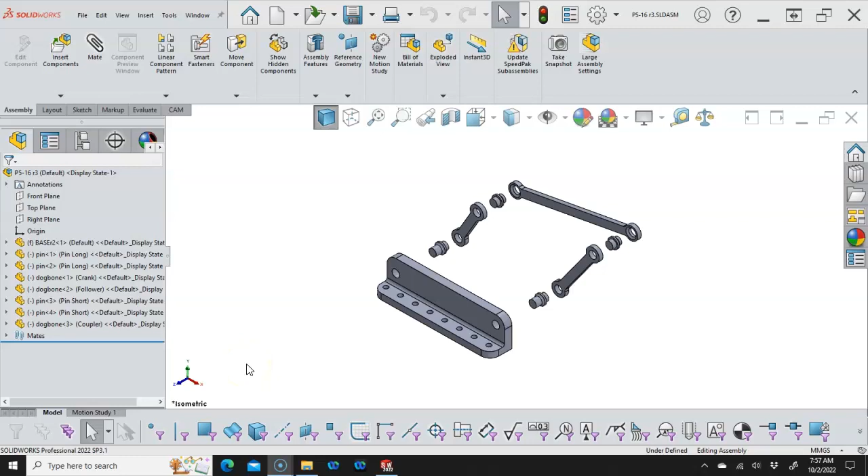I'm going to prepare this model for 3D print, and the process is pretty much the same regardless of the manufacturer. For 3D print, the plastic moves and the accuracy is pretty good, depending on the printer, filament, heat, and all the settings. But we're going to look at this the same way, same process. Even if I was making this out of aluminum, bronze, brass bushings, or stainless steel, different materials, I would still go through the same considerations.

One of the items is, if I was going to pick what to be stable to base the other parts off of, I would pick the base. So that 10 millimeter hole location would probably be a ream, or the one we say is not going to change by very much - the hole basis, the one that's stationary and stable - and then we're going to vary the shafts around the bores. Sometimes it's the reverse, depending on the assembly, but we always go through that process of making those decisions, and there's a lot of little decisions.

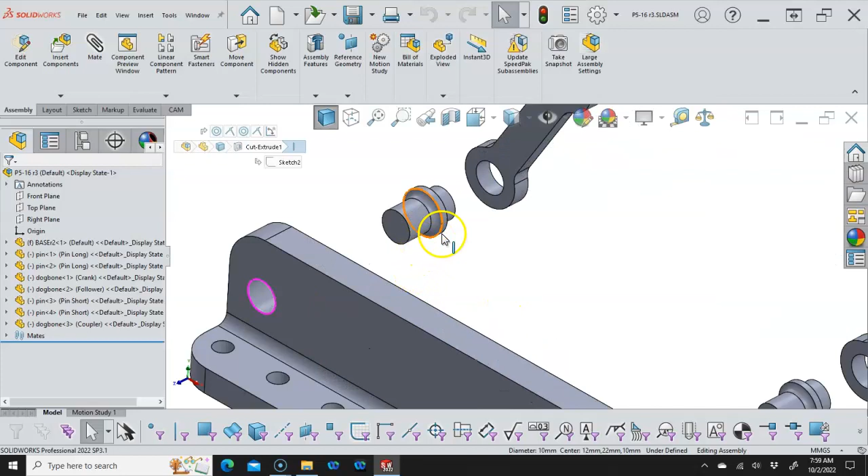We already put a relief on the pins so that it would engage and be able to come up flush to that edge, and the chamfers on the base and the coupler to be able to dial those in.

So now we have to think about what's going to move, the dynamics of this part. On the hole basis, do I want this to be a running fit where this will spin inside of the base or spin inside of the crank and the follower? Same with the coupler - which one's going to spin and which one's going to be stationary.

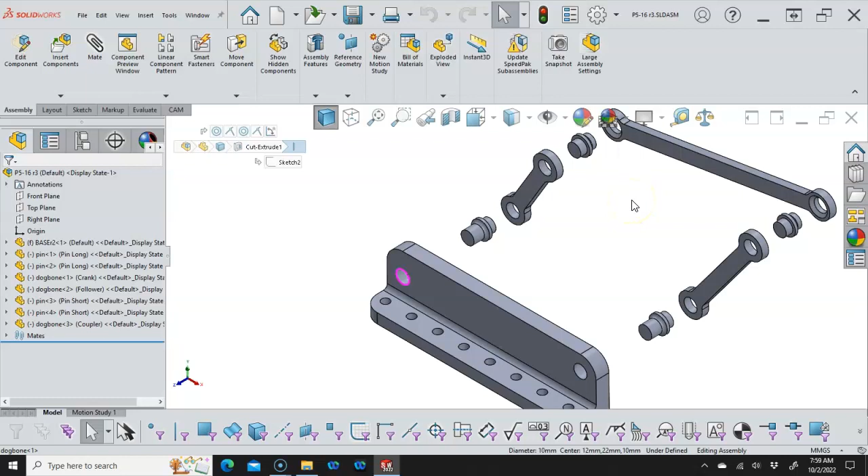So I'm thinking about these surfaces - and why did it jump back into my explode? Oh, I'm in the explode, so apparently I'm allowed to edit or make adjustments. I don't think my orbit... no, I don't think anything's turned on.

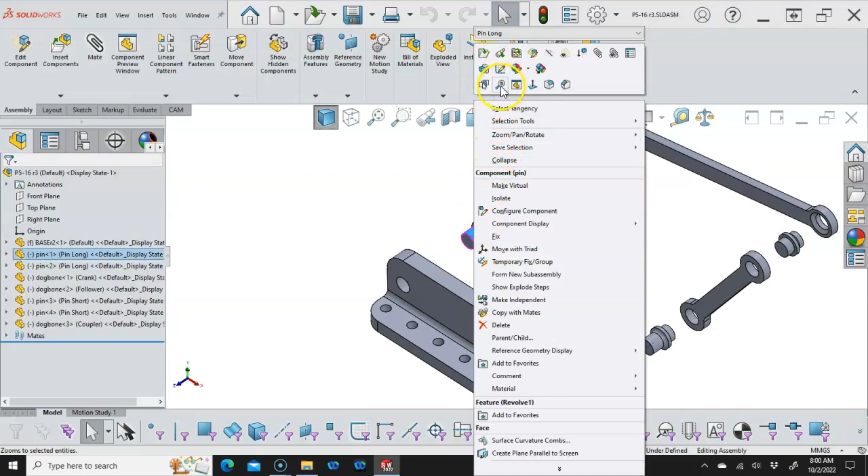Let's go ahead and measure these. If this is 10 millimeters and this is 10 millimeters, that's going to be a light press. It's going to have less chance of spinning than these guys. So of the two, if this is 10 millimeters and this is 10 millimeters, this would also be a light press, but what I can do in making these adjustments, because it's the configuration, we can do pretty much the same type of thing.

I'll open the part. On this side, I want that to be pressed in, pretty much a transitional to light press. Transitional means it could spin a little bit, or it could be stationary, and that's strictly based on the movement of this part. As soon as we inject a power source - a motor, a pulley, a belt, a gear system - then I'm going to have to change my logic to match.

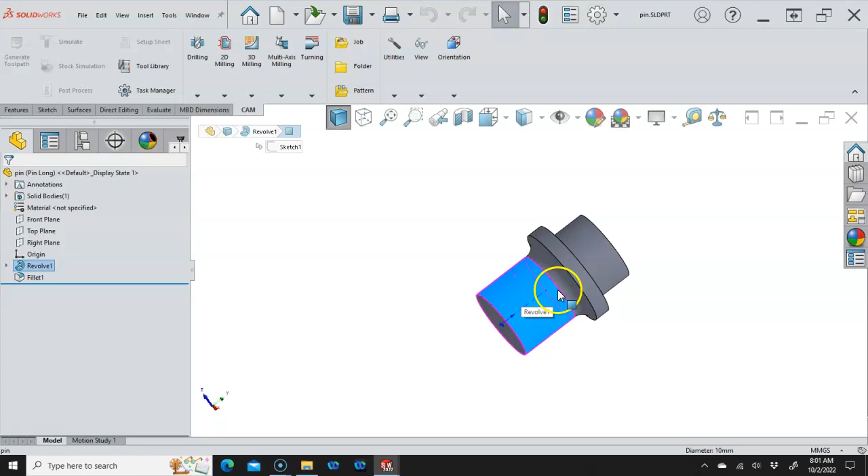If the base is stationary, then maybe those items get reversed, so that the shaft that's driving this, the retention elements are able to be put in place to actuate the mechanism. So the other thing of note is that there is no retention as of now.

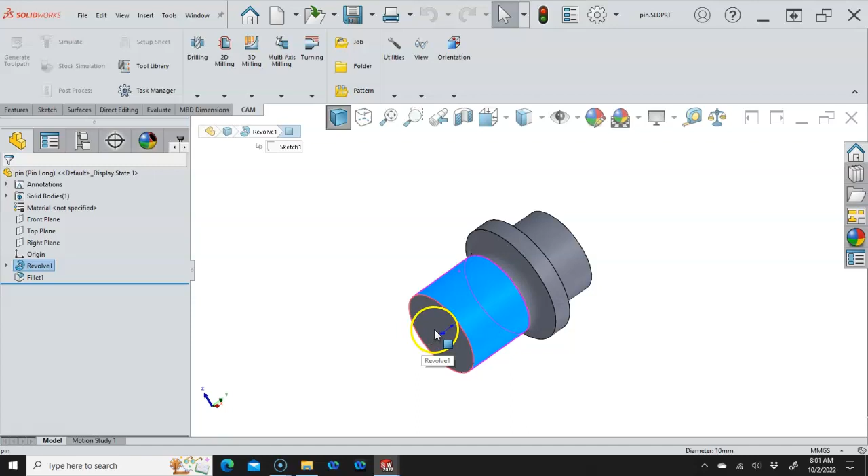One of the things I'm going to put in real quick is the Hole Wizard. We haven't done Hole Wizard yet, so this will be this semester - we'll do a quick introduction. With Hole Wizard, I pre-select the face and tell it which ones I want. As a general rule, I don't do threads on the internal side. If I'm 3D printing, we'll take a look at the threads, but most of the time I'll have enough wall thickness to put in the minor diameter of the tapped hole.

So we have counterbores, countersinks, straight hole - which can also be used to make dowel holes - straight tap, pipe tap, or tapered tap, getting into legacy stuff from the Wayback Machine, 20 some odd years back, but that's where it started, putting in all the geometry manually. We also have counterbore slots, countersunk slots, and just a straight slot as a Hole Wizard item.

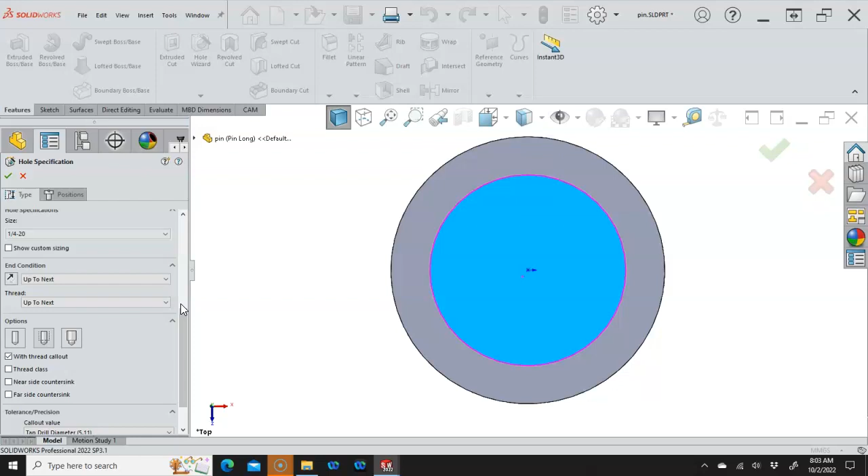So when we look at these - we haven't gone through the thread definitions yet - but if I go with a 1/4-20, that'll be either a button head screw, or possibly a socket cap screw, maybe a hex. Up to next on the definition, that'll be a decent size to run the outside of the part, and with a washer the head will have good contact and retain the piece. So the 1/4-20 up to next - we can leave the thread callout, the class of thread, if we need it.

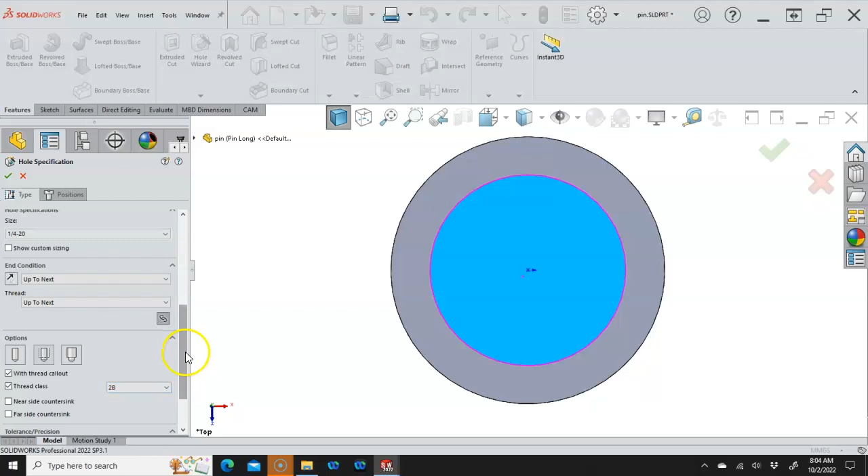One is the loosest tolerance, 2 is a standard tolerance. Most threads are going to be in that 2A or 2B, internal or external. 3A and 3B are the tightest, and then everything else is pretty custom to the application.

So when I place the point at the origin, we'll get back into select, I can look at the preview, hit OK, and it also takes a little bit out of the geometry, so it's that much less to print and weight wise.

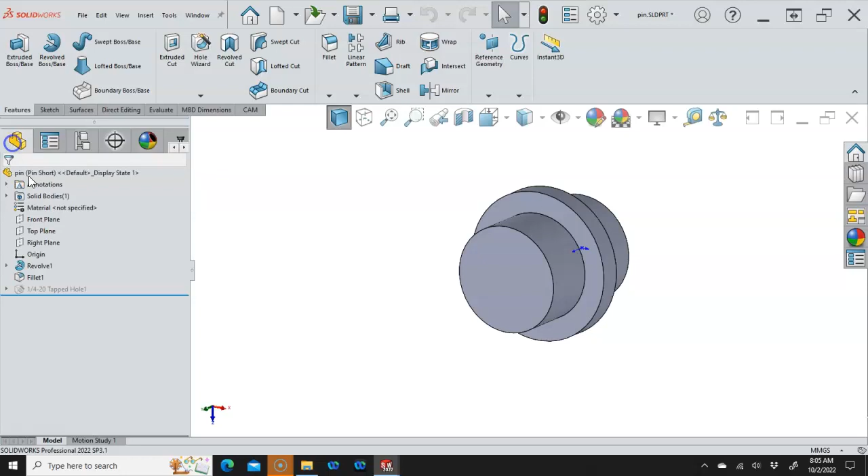Want to check the pin short, we're going to do the same thing. So show configuration, since it's not double clicking, or I'm not double clicking in the right place. So the tapped hole gets suppressed. We'll unsuppress it in this configuration so that it participates. Make sure to save it. Oh, and I did not do the holes.

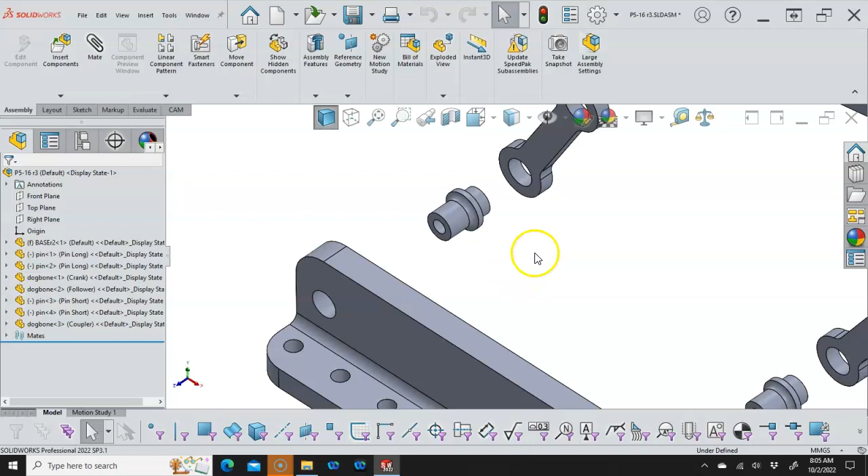Well, maybe we can do that here and have a better sense of which way it's going to go. So the holes on the crank, the coupler, and the follower, we say that these are the press, these are the slip. Then on both of these, the short pin and the long pin, we'll need those sides to have a minus tolerance.

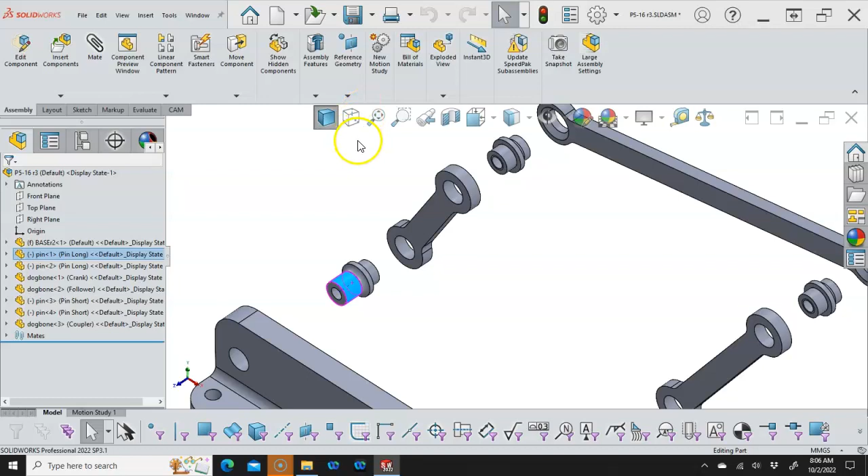So we can introduce the maximum material condition. For a shaft, of course, the maximum material condition is the largest diameter. On the hole, it's the smallest. Now I got to think what I just said.

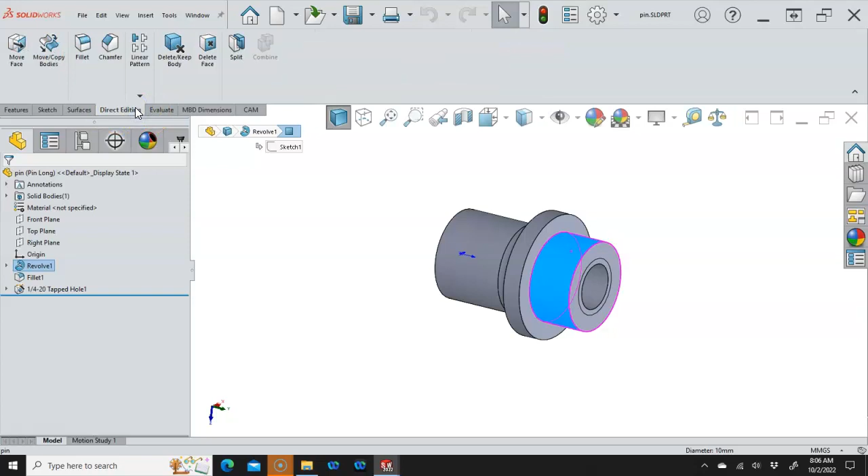All right, let's work through it. I'm going to do direct editing for this. We're going to move the face, and I'm going to move it half a millimeter, 20 thousandths. I'm going to make sure this thing can spin.

All right, so it also is going to have a little bit of run out, but based on the smoothness, all right, let's make it 10 thousandths, 0.25.

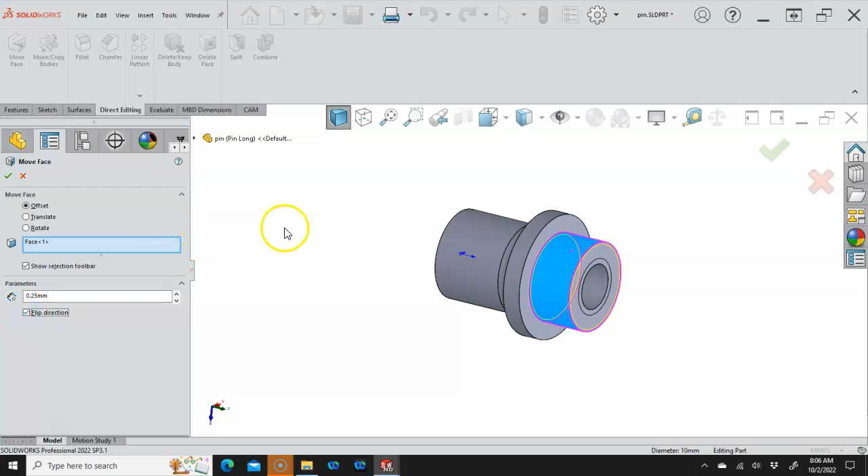So if I flip the direction, we go that way or that way, I can see that the material is being removed to the inside. And now we have a least material condition that instead of the 10 millimeters, we're at 9.5.

So one of the things about the direct editing is it's removing it radially, so 20 would have been quite a lot.

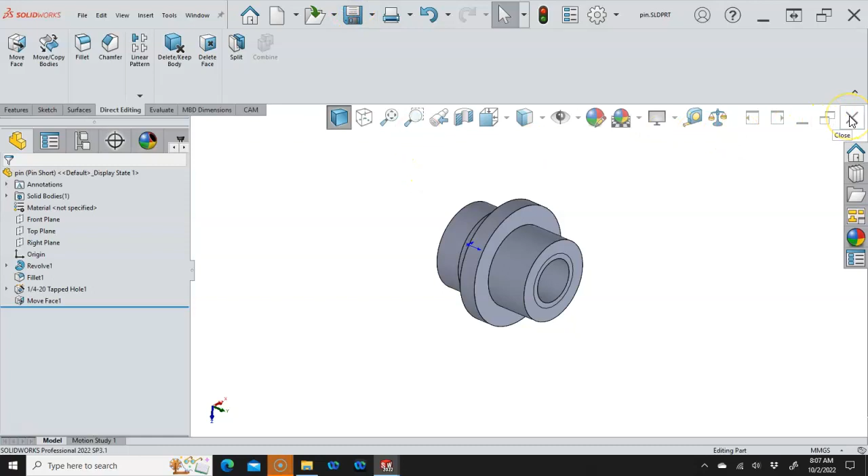All right, same thing. I need to make sure that it occurred in both, and it did not, so we'll unsuppress, save it, and I can close it again, or I could leave it.

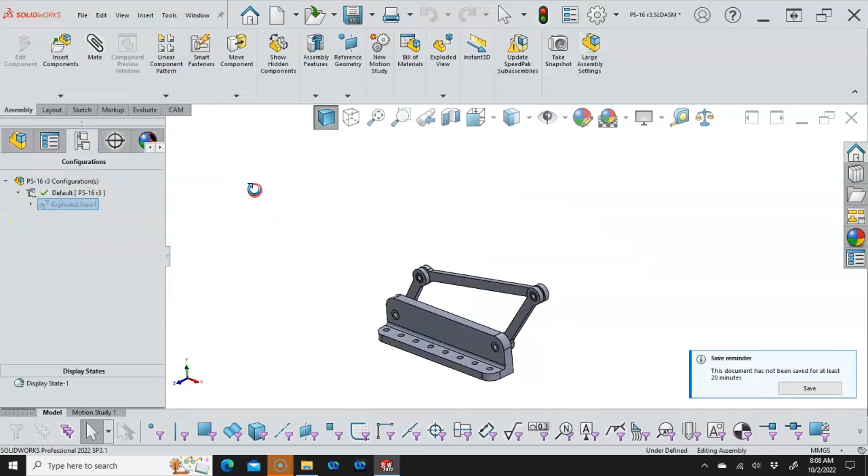We're gonna have to go through. So if you have material and could print this in its collapsed state, there are printers that can do that. We would have to figure out a best position because there would still be a lot of support material.

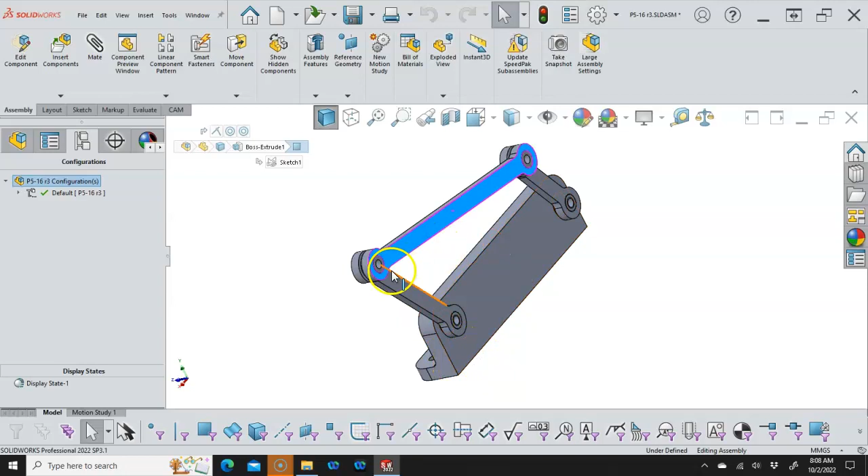Yeah, so if we're in the dynamic — oh, I don't have a dynamic right now. If it was in the dynamic, I would need to bring this down to where it's pretty much tangent to the base so that there would be minimal support. I wouldn't want to put support material from the bed all the way up to this just to print it in that position.

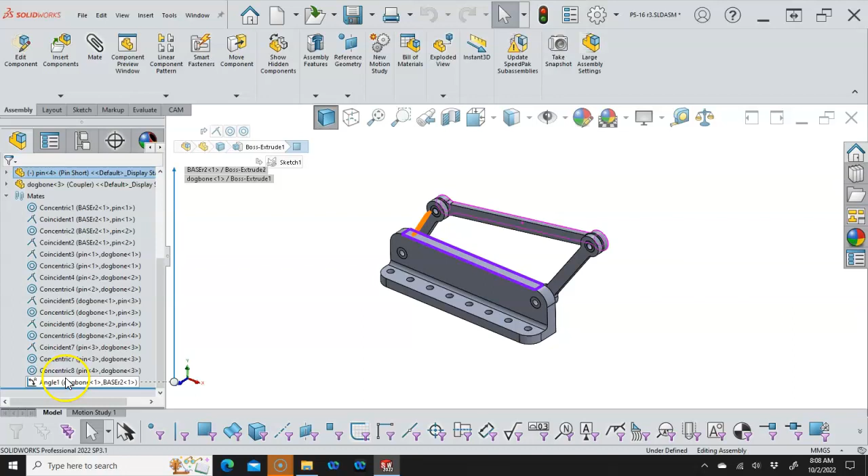So if we were to rotate it over, let's go ahead and find that mate. And if I suppress it, and we bring it over so close, I may not even be able to get there with that geometry. So at least minimizing some of the support material.

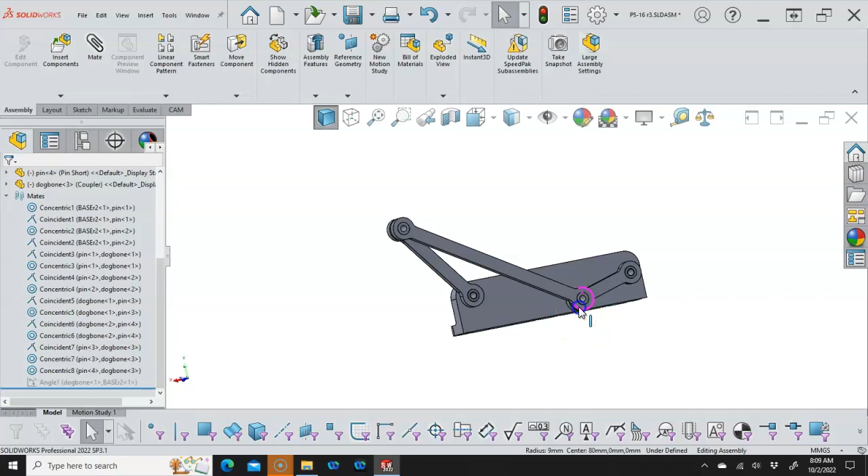So something like that, or in there. Yeah, it's going to be better to print it individually.

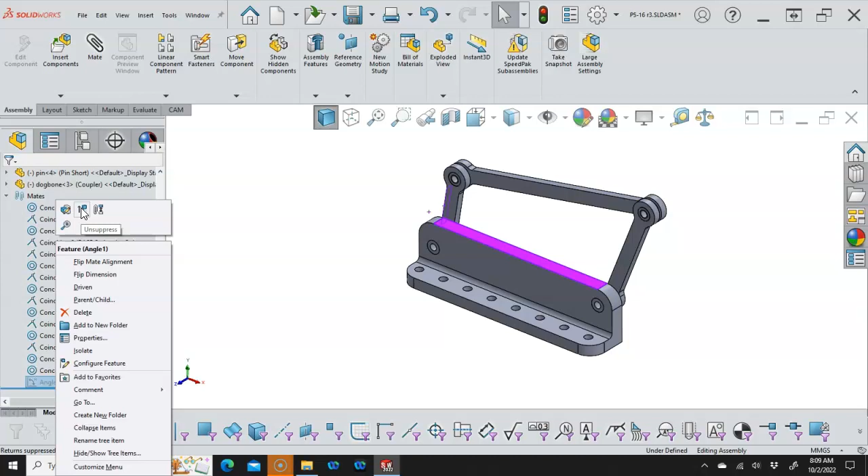All right, so I'm going to do the first one, and then we'll walk through the steps of outputting, and we'll put it in the slicer to see what we can do with the geometry.

So I'll open up the base, open up each of these parts. Really only need one instance of each item.

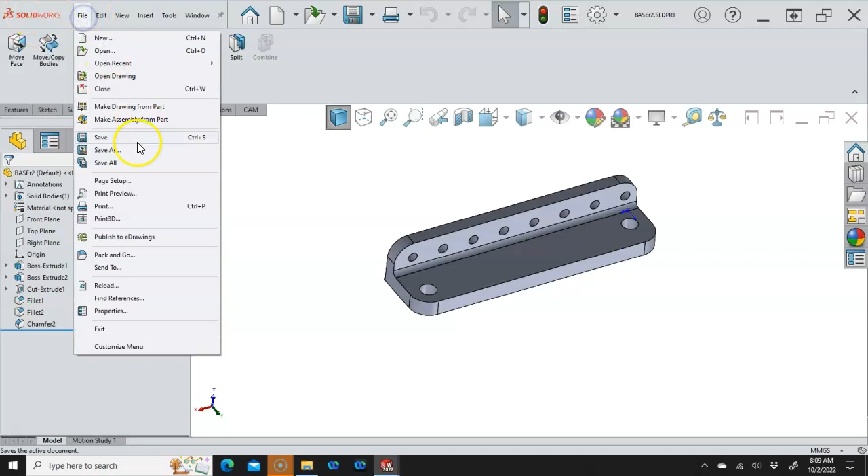So we're going to do the file Print3D, and this is just going to give us those basic settings.

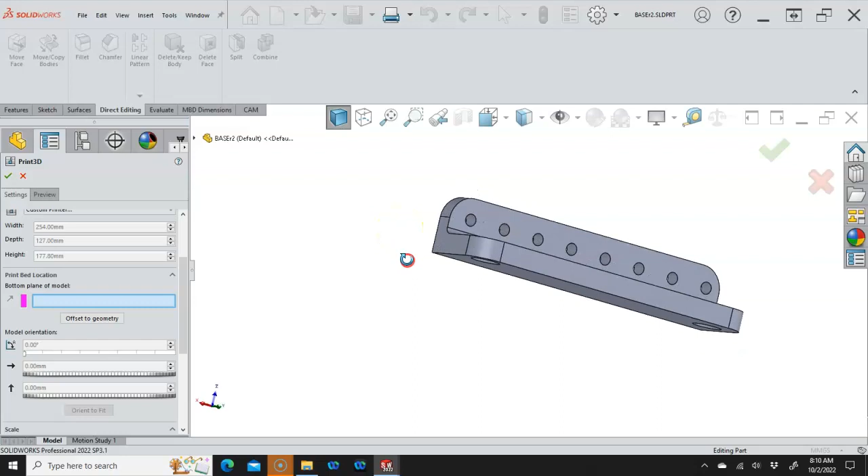So I mentioned before that because of the drift, the droop, the collapse on the print, if I want these to be the roundest holes, I'll print them in the vertical orientation, whereas when the filament's going up the side, it has a tendency to collapse. Not much, but something that would be noticeable.

And then we can come down to the save as. If you want to do the preview, there are tools as far as the build analysis where supports might be needed, have those options available. And I've been using the 3MF, and it always warns me.

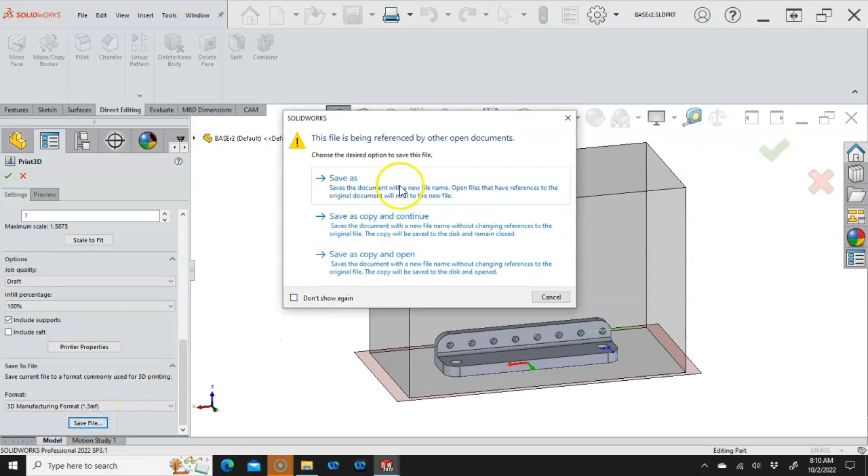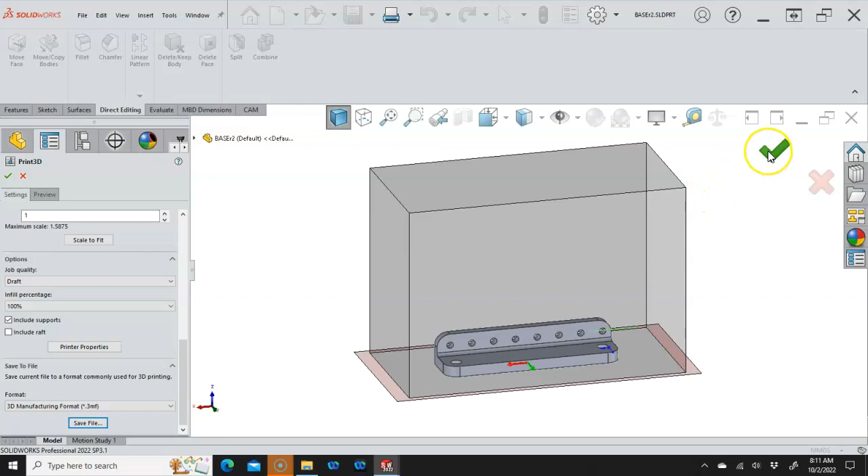Oh, I guess it's going to do the 3MF and save. And then the textures and transparency, those don't — it's the disclaimer that says those don't automatically go over. If you're not using material capable of it, you're not going to get it.

All right, so we'll pause here and let the Simplify 3D — if you're using Cura or Repetier or any of the other slicers, it'll be similar. You'll always have that same settings of the envelope, the recipe for the current print, and this is the last print that I did of plugs for the tooling plates.

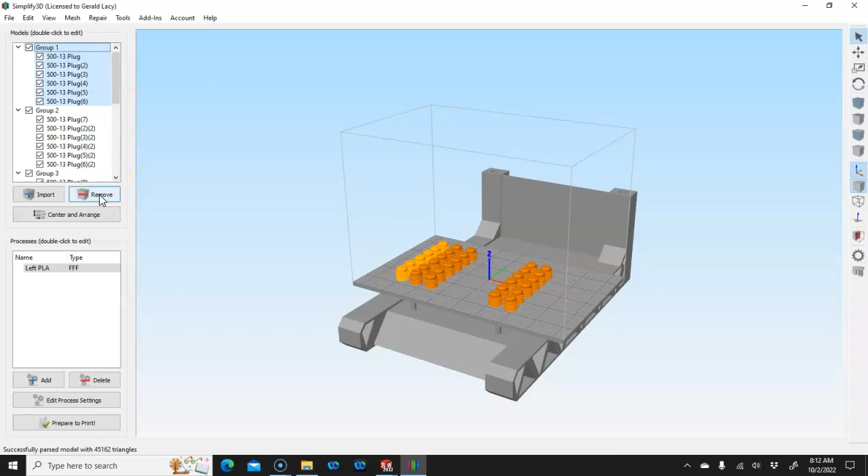So if we remove those groups, then that will get that out of the way, and I can import. Now going to the drive and my assignments, and we'll find the 3MF.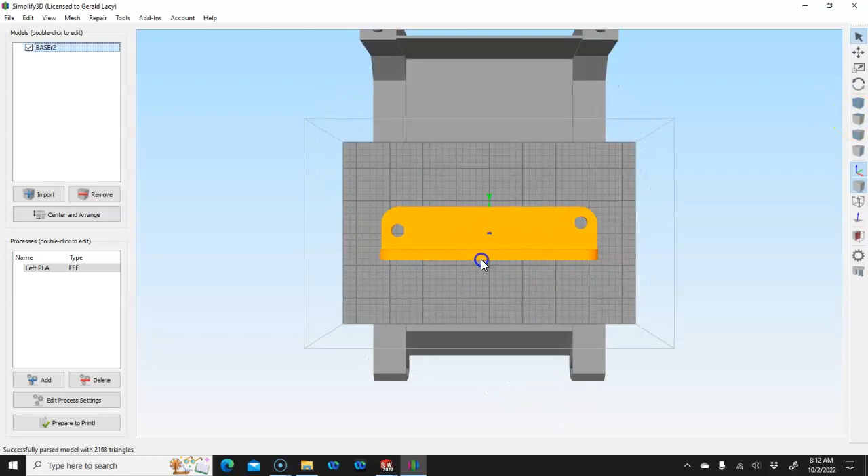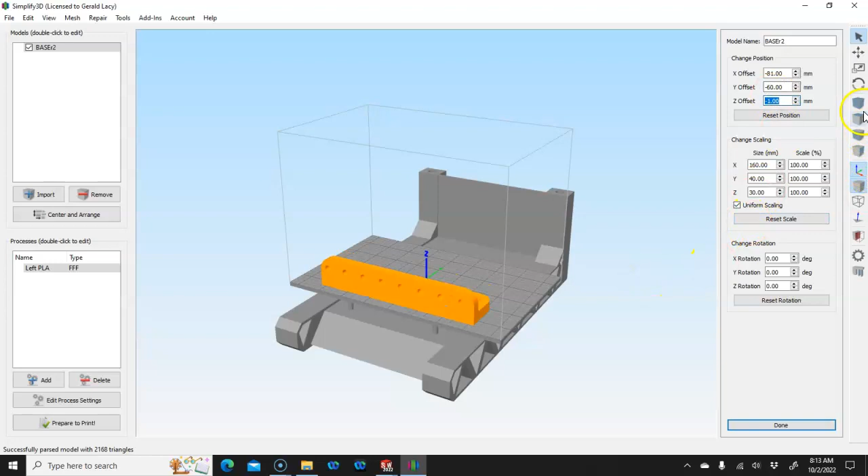All right, so it goes into position, and if I'm looking at it from the top, then we can move its position. So in Y, it's at minus 21. Let's see what it looks like if I push it out closer to the edge of the bed. I don't want to get too far off, and then if I can get the coupler, crank, and the follower in there, then this will be a complete print.

All right, so I've gone through and I've exported the component pieces into the translation files. I've imported them in. I like to keep them kind of close, so there's not a lot of travel.

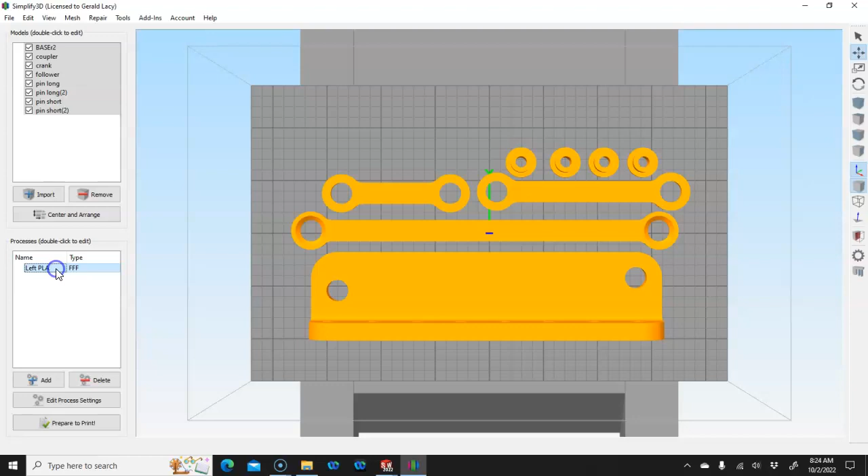If we do the skirt, then let's go into the settings. These are standard for this printer with the PLA. Layer settings, the skirt brim - so instead of trying to go around each one, it should just make a loop around the whole thing. Infill settings, how much air is going to be inside of each of these. We typically aren't going to print them solid because, well, internal stresses and the heat, and they'll pretty much turn into a banana. And then we don't have anything that really needs supports.

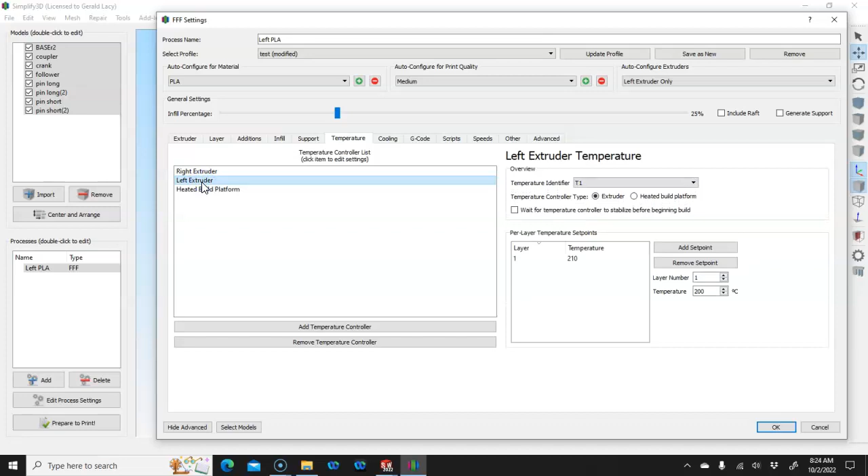Temperatures for the extruder, the fans, outputting the code, build volume, what we can fit in there. Everything else I hardly ever pay attention to as long as it's working. And we go ahead and hit OK.

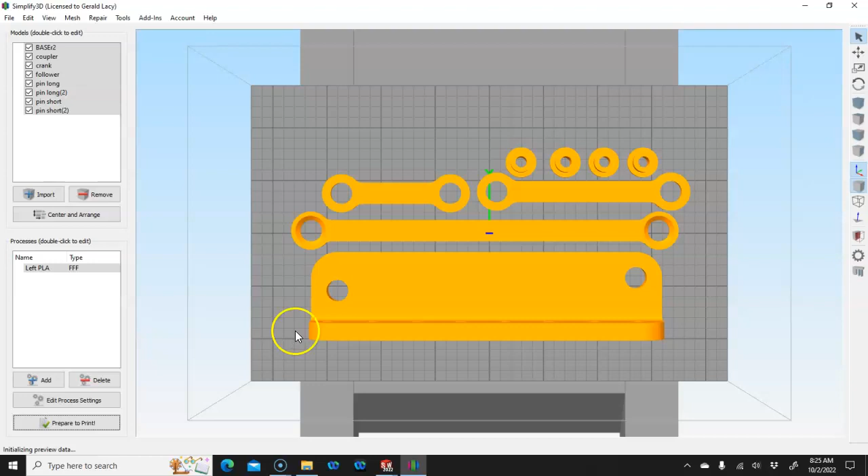All right, so at that point we tell it to prepare to print. And we should go back. Yeah, it's going to be about 5 hours. That's not terrible. And it's going to have to think about that one a little bit. There we go.

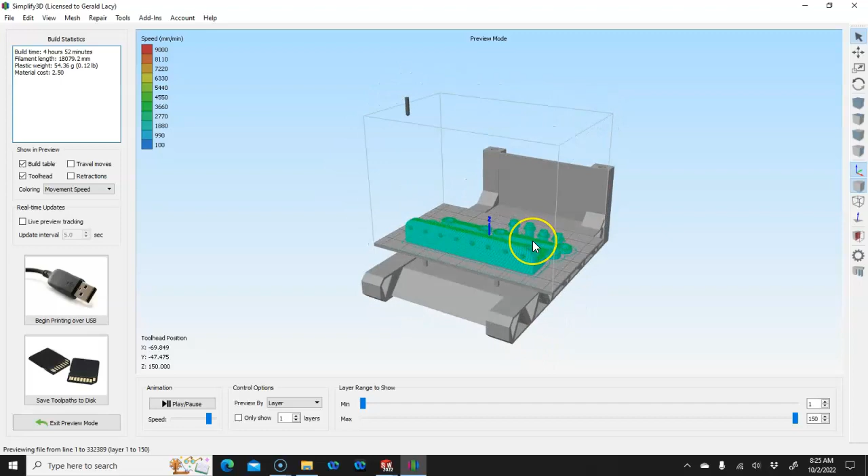All right, so if we go through the slice, let's see, from the max to the min, we're going to have to come down quite a ways. We'll start to see that radius right about there, and it builds upon itself rather than just all of a sudden trying to go 90 degrees and overhang. On the top side it really doesn't matter, but it needs to step out and away as it goes through that process.

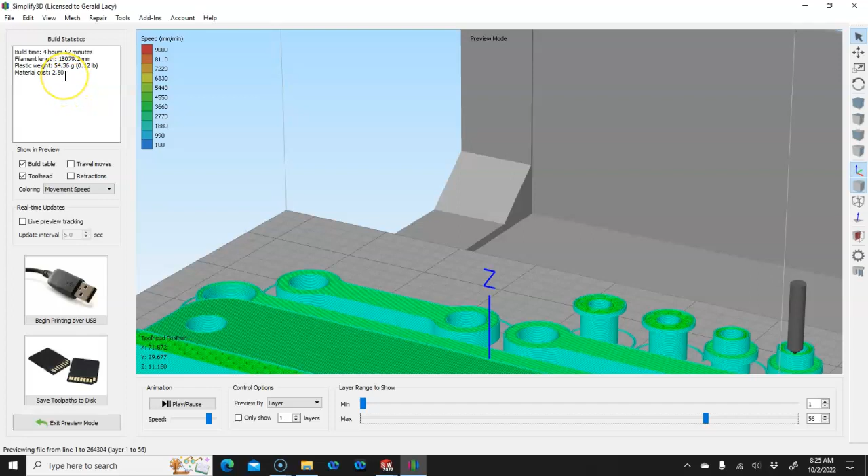So material cost estimated at $2.50, and the plastic at 55 grams.

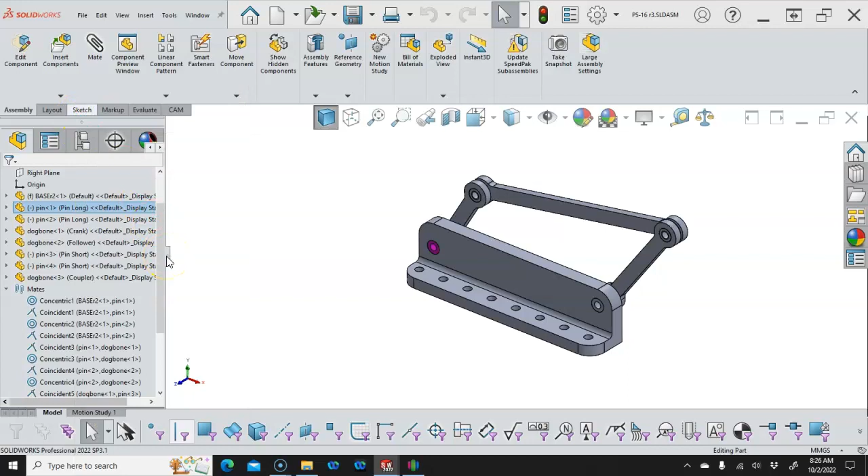All right, so we're going to switch back over to SolidWorks and open up the pin one more time. And I'll just make the modification here to the default.

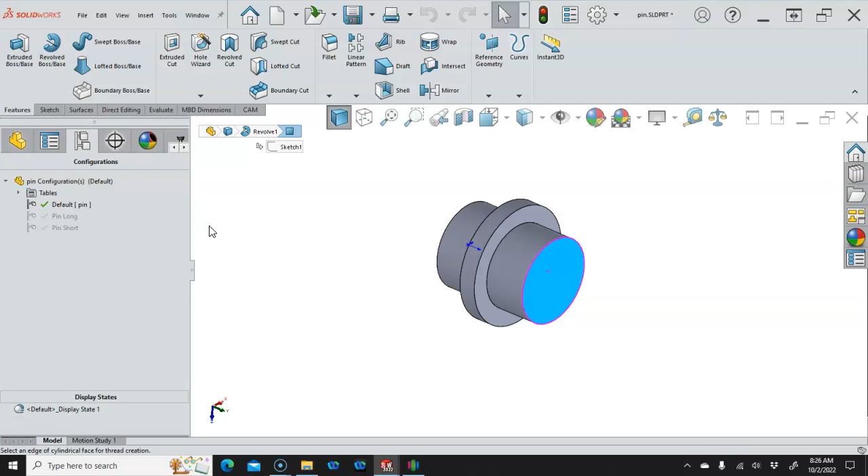So let's get into our default configuration, and all of those should be turned off. And it's in the short, which is fine. So under the hole wizard, there is a thread, and the problem with printing threads - we'll kind of see that. We'll take a look at the plug - is that we have to make adjustments, and it always warns you, too, if you're making something precise, it's only going to be as good as it gets.

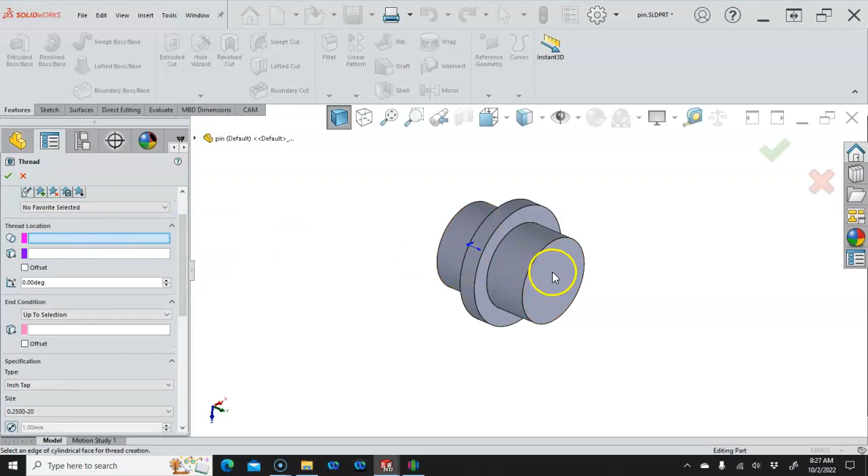All right, so we need to find our settings so that it can be an inch tap. It's set to 1/2 inch 13. I want to be at 1/4 inch or 250-20. And the thread location - still not sure why it's not letting me get a thread location. Thinking about it. So it should find the center. And it's lagging pretty good, so it's having to think about it.

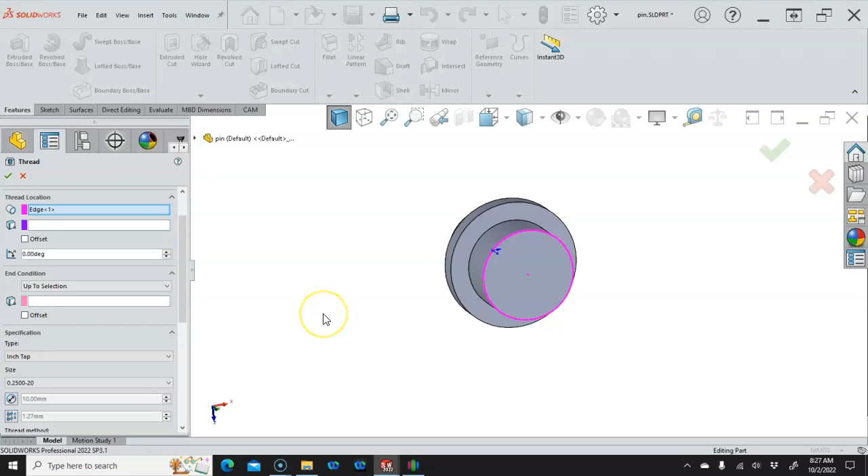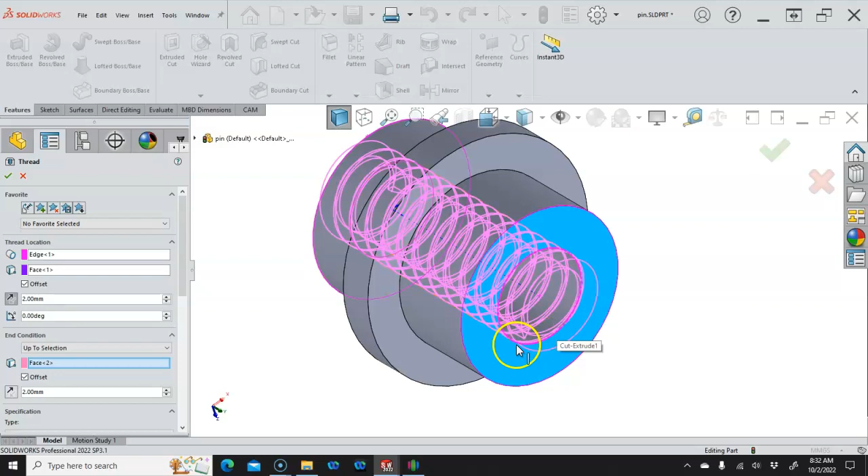All right, I'm gonna go through the settings and pause one more time. Okay, so I had to go back and put the minor diameter in. Usually we'll make the minor diameter a little bit bigger. We're going to see how that affects it - it's given me errors before. So the edge is the ID, or the minor diameter edge, face to start. We'll usually offset it a little bit more than the pitch so that we get one full revolution above and one full below, to make sure it doesn't leave a truncated thread.

So those are my selections. The offset 2 millimeters, up to selection another 2 millimeters. If we reverse those, it starts inside or finishes inside, finishes outside. Oh, it was still on the inch die, so we'll go back to the inch tap, and the 1/4-20. And there it goes. There's a little bit of computing power going on here.

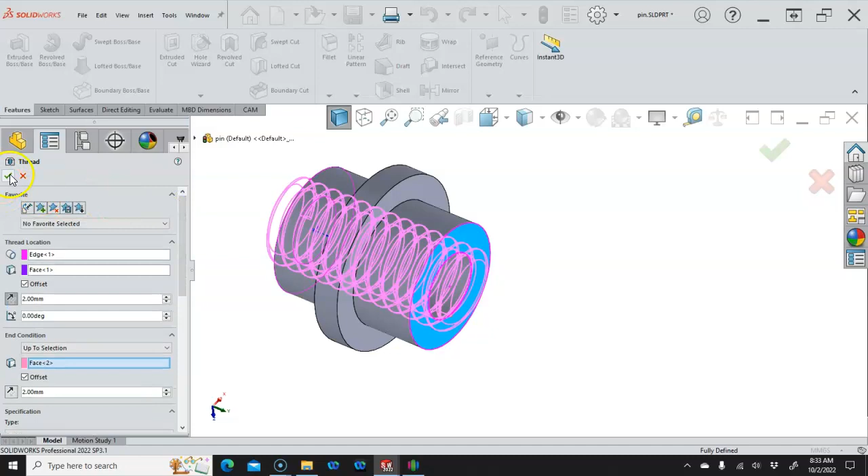We're not doing multiple starts. Not worried about trimming with the start face, end face. Everything else should be good. If we can put that in there, we'll see if it completes.

All right, so it actually would print that thread, and maybe I'll do one of those. But typically, I'm gonna have to take the tap and run through there anyway. Depending on the accuracy of the print, well, we'll see what we get on that one. So we'll spend some more time with the thread wizard there later on, but at this point, I have enough to be ready to print.